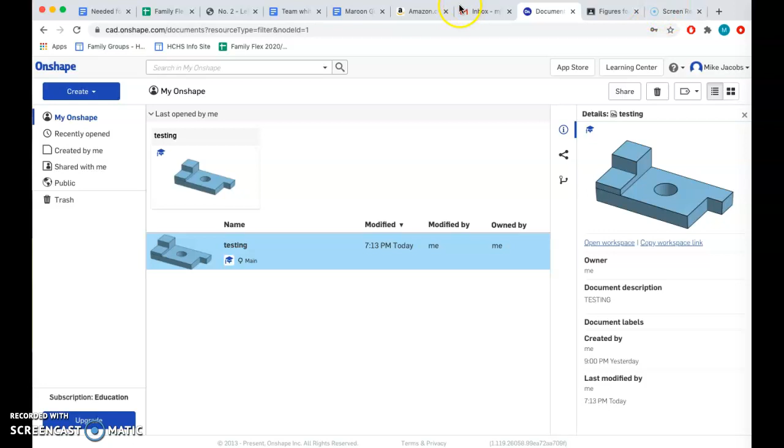Looks like it's onshape.com/education-plan. So I appreciate you doing that. I would like to just spend a little time. We're going to do that figure right there.

The figure is this guy right here. Okay, now it's on Google Classroom where you can see it. I took a picture of it and threw it on my phone just to reference while making stuff. So, yeah, I hope this goes well. Feel free, of course, to email anytime you need any help at all. I'd be very happy to email you.

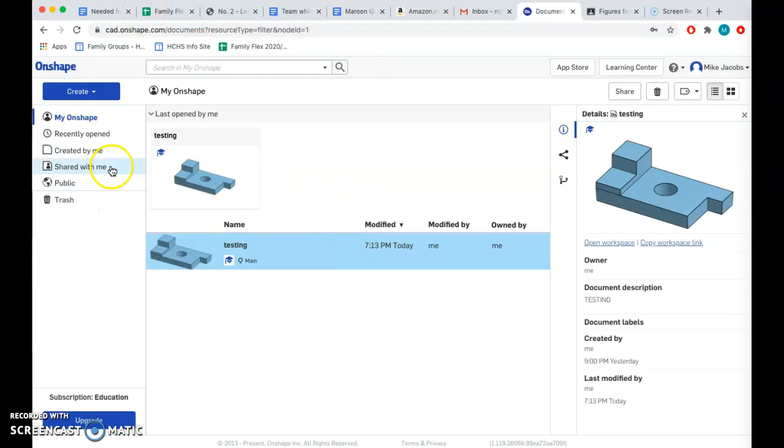Okay, all right, big thing. Create, that's what we're going to be doing. Create a document, and I'll just call this Nathan and Owen. Boom. And we're going to go ahead and get the basics.

Now, please forgive me if I'm a little bit rusty with this. I've only been playing around with this for an hour now or so. So it's useful, it's doable, definitely. I think it has all the same tools as SolidWorks. The only difference is that I'm a little rusty at finding the different buttons and stuff like that. So, but I think you guys will be very forgiving. When we're in the classroom, obviously, we are going to use SolidWorks.

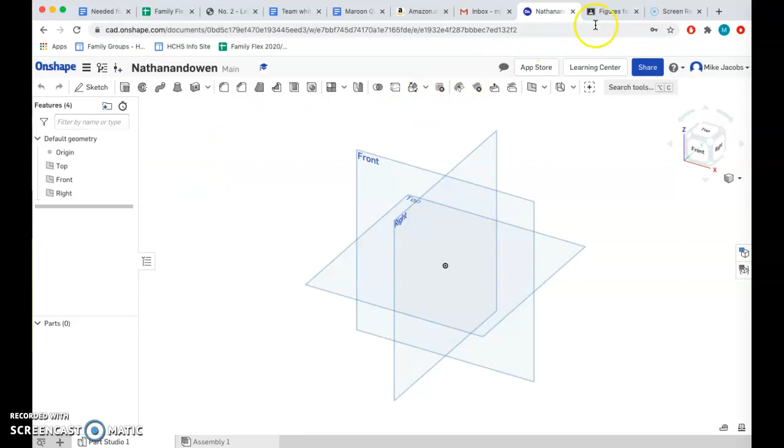Okay, all right, so like I said, we're going to go ahead and make this figure right here. First thing you're going to do is go to Sketch. Now, there's two things: there's Sketches and there's Features. Sketches are 2D, Features are 3D. So you always sketch something in 2D and then you're going to make it 3 dimensional to do a feature.

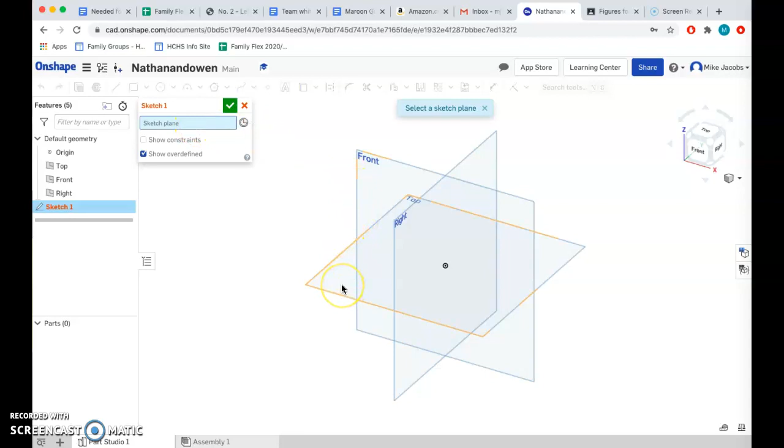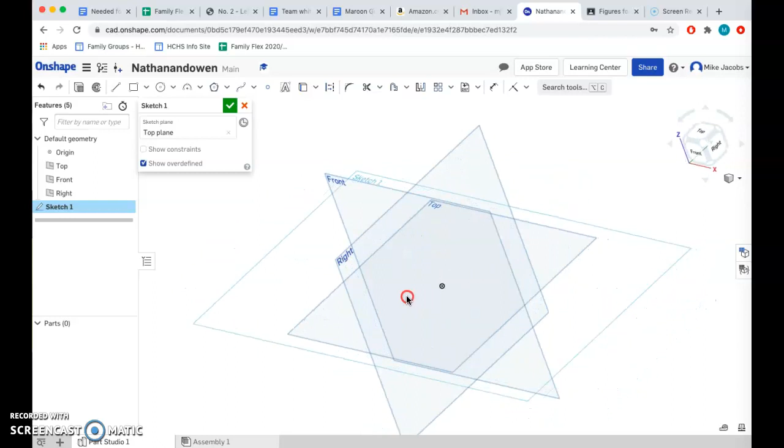All right, so sketch one, it wants to know what plane do we put it on. Our planes are, we can do top, front, or right. In this case, I'm going to go on the top plane, okay? Now, moving around, if you want to zoom in, it's your scroll wheel, so zoom in, zoom out. Tilt stuff, use your right click, your right mouse button, and you can click stuff around to move it, okay?

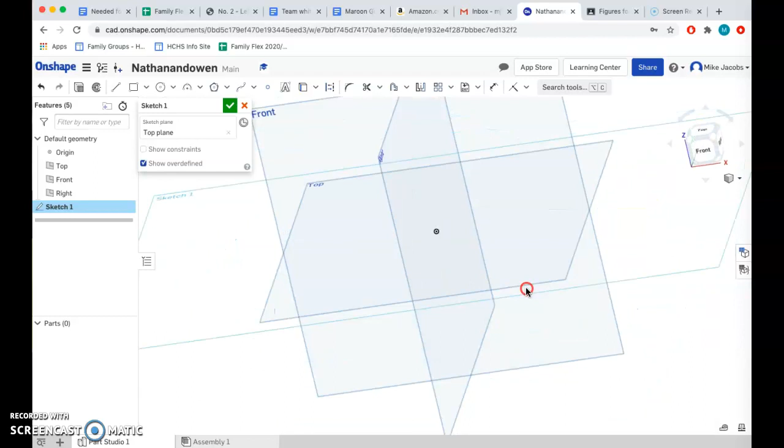You could also click different areas of this box right here if you want to see the top or whatever it is, okay? So I believe I did click the top already. Yep, because sketch one is right over the top right there. First thing we're going to do is do a rectangle. Do make sure it's a corner rectangle. You can do corner, center, corner rectangle.

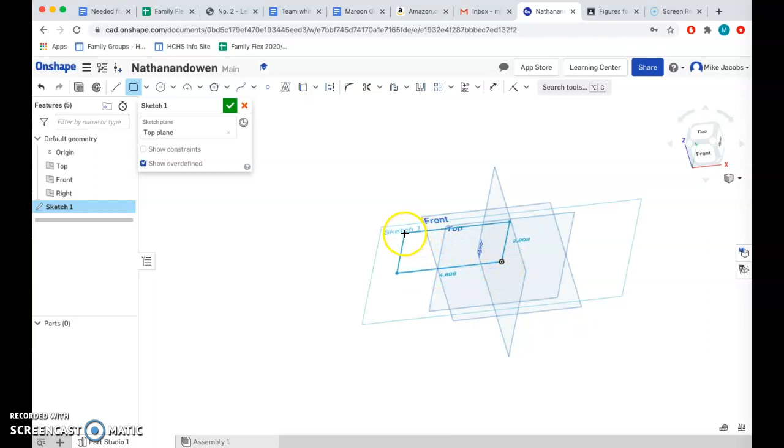Second thing, it is a good idea to get in the habit, that's the origin right here, of always, whenever you sketch something, get in the habit of starting at the origin. That's really, really important. Now, I just noticed here, hopefully I don't have to redo it, but my units happen to be in inches. I do want to change that.

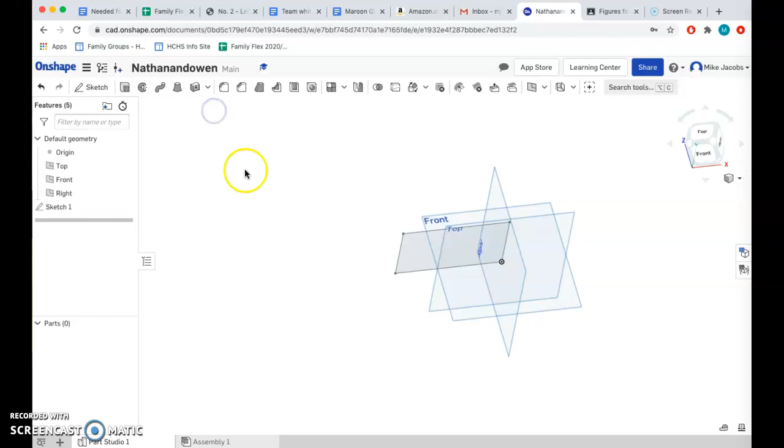So I'm going to go here, my document menu, and go to workspace units. And I'm going to change this one. Oh, that was not good. Change this one to millimeters. Okay, so let's see what that does. Okay, I think we're in millimeters now. We go down here, sketch 1.

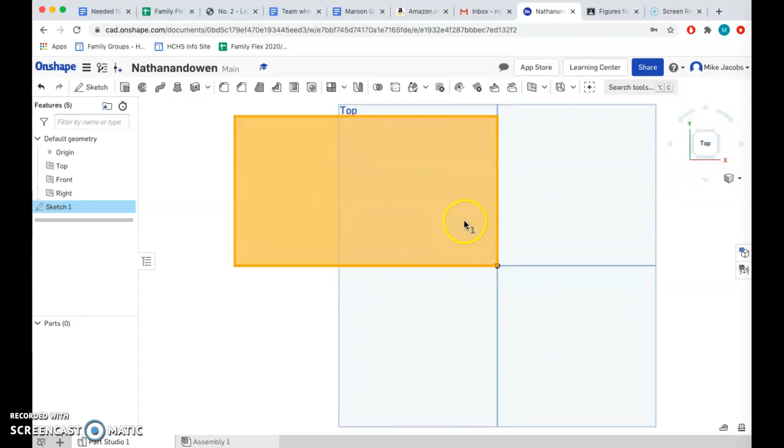Okay, just making sure I'm on the right sketch. Yep, I'm looking straight down at it, so that's good. Sketch 1, I'm going to hit edit. I thought I was editing it, but obviously I got out of it when I went into my document menu.

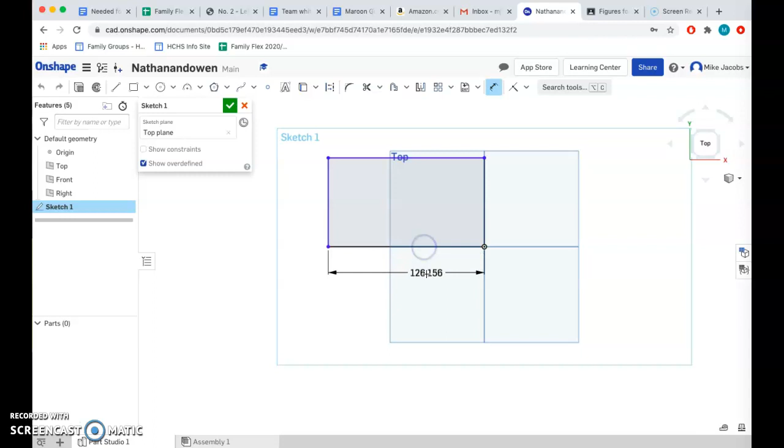This right here is dimension. You'll see in SolidWorks that's called Smart Dimension. Now, if I look at my figure, I'll take this line right here and make it 114 millimeters. And this side here, it looks like it is 57 millimeters right there. Okay, so we got the basic layout.

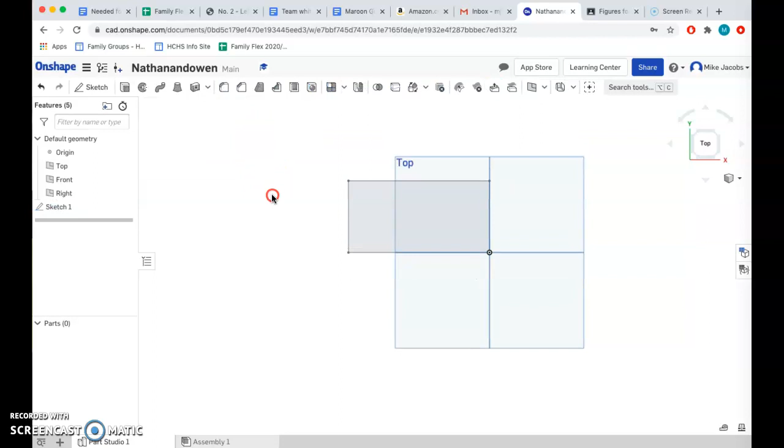I'm going to go ahead, hit the green check to make it so. Move it a little bit to the side. Now we're going to go here. We're going to go to extrude.

In SolidWorks, when you use it, it's going to say extrude boss base. This one just says extrude. So what we're going to do is pull it up. Blind means you're going to pull it up just a certain distance, and the distance we are going to pull it up is 19 millimeters.

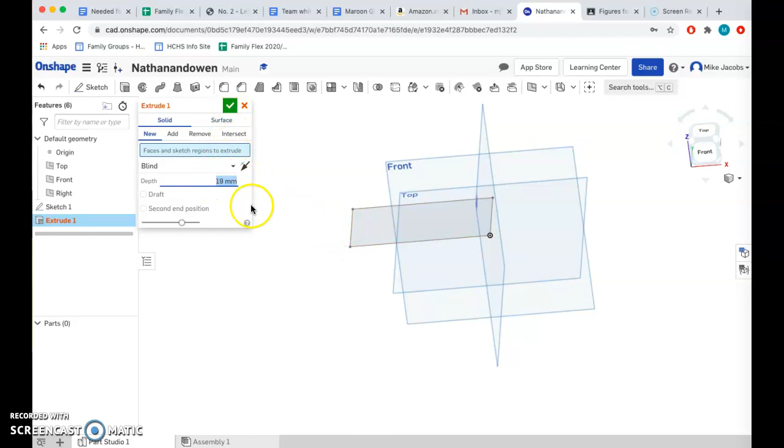So I'll go ahead and hit that. Oh, it's not sure what to pull up, so I think I better click in there. Now it's like, okay, that's what you want me to pull up. Sounds good, we'll do it 19 millimeters. I'm going to hit the check, and we are good to go. So all we did is we made a box and put it up 19 millimeters.

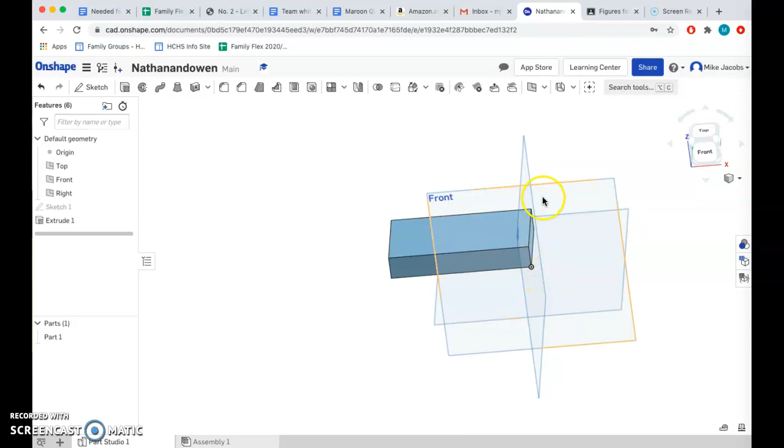I'm finding these planes here to be annoying, so I'm going to right click on it, and I could hit hide all planes. I'll just try hide all planes. Yep, and so we hid all the planes now. We can get them back later on if we need them, but we're not going to need them.

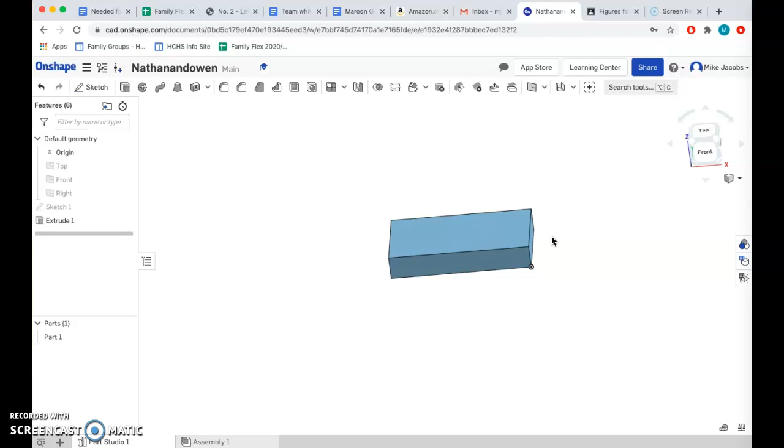Next thing I'd like to do is lop off this corner right here. Looks like it's 38 this way by 16. So I'm going to do another sketch.

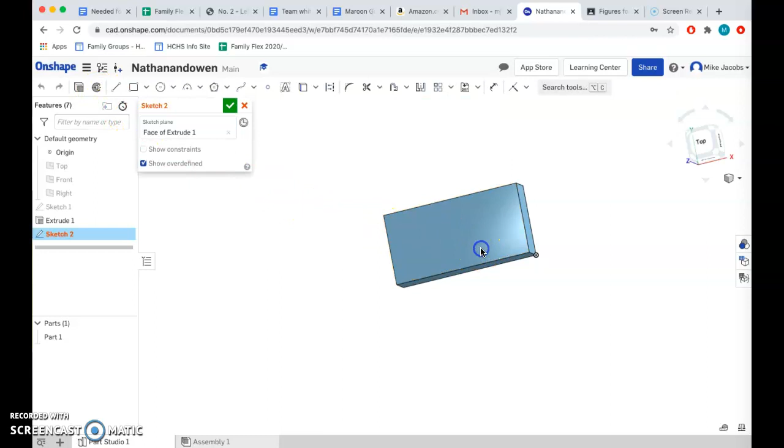Once again, always sketches are 2D, features are 3D. I'm going to click right on this, and it says, okay, you're sketching right on the face of Extrude 1, which is perfect. Okay, I'm going to grab another rectangle.

I'm going to zoom in a little bit, go from this corner, get it close enough. Do a little smart dimension, take this line right here, and we're going to make that one 38. Looks like I was about 10 millimeters off.

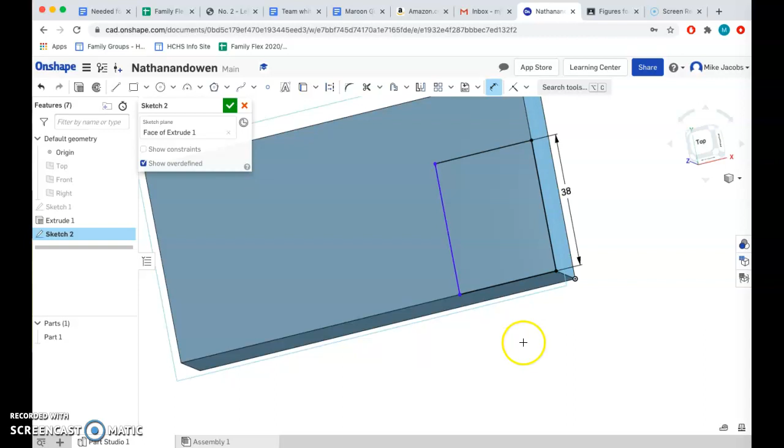Now, I'd like to try something. I could click on this line right here, drag it off, and make that one 16, or let's see if this works - click on this line to that line. Yep, and so it's saying from here to there, we want that to be 16 millimeters as well. Okay, so we have a nice little corner.

If we take a look at our figure, this corner right here, that is what we are lopping off. Now once again, I'm going to go to extrude.

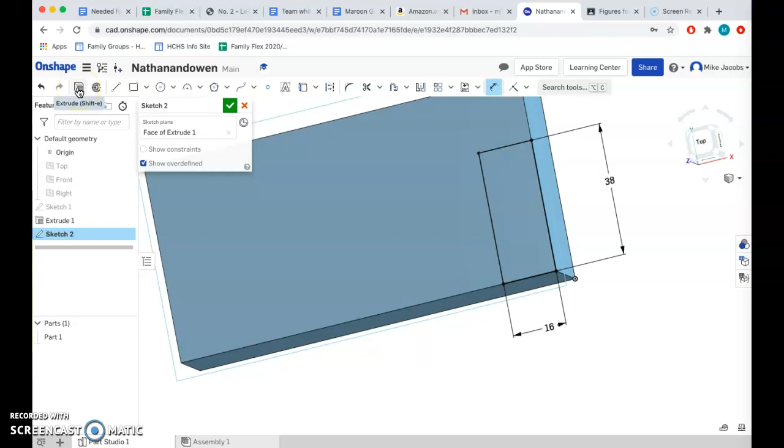Now this is a little bit different on SolidWorks. Here you have to go to extrude and then remove - extrude and then cut it out. On SolidWorks, it's a separate button. You've got an extrude button to add material, and then an extrude cut to get rid of material. I hope it's not too much of a transition for you once you get back into using SolidWorks.

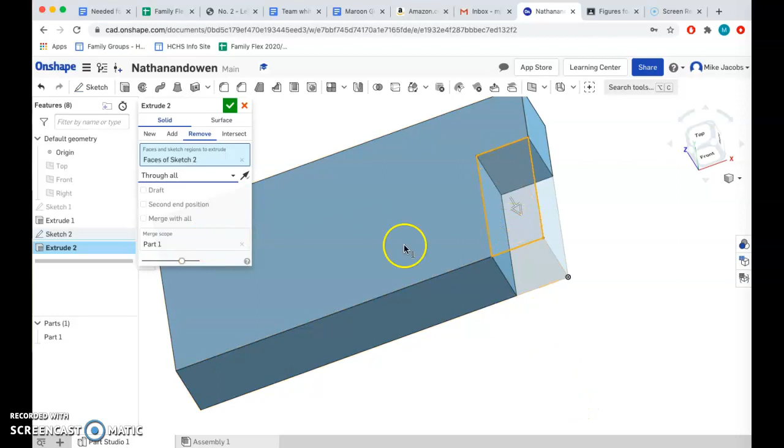Okay, now it's saying blind, and you want to cut off 25 millimeters. You know what, I really don't care how much I cut off, so I'm just going to hit through all. That'll just cut it off forever and ever. Amen. So that's a good start to it.

We lopped off that corner right there. Take a look at the figure.

Next, I'm going to build this up right here, all in one block. Then once again, I'm going to lop this little guy off. It's the width of the thing, 19 millimeters right here.

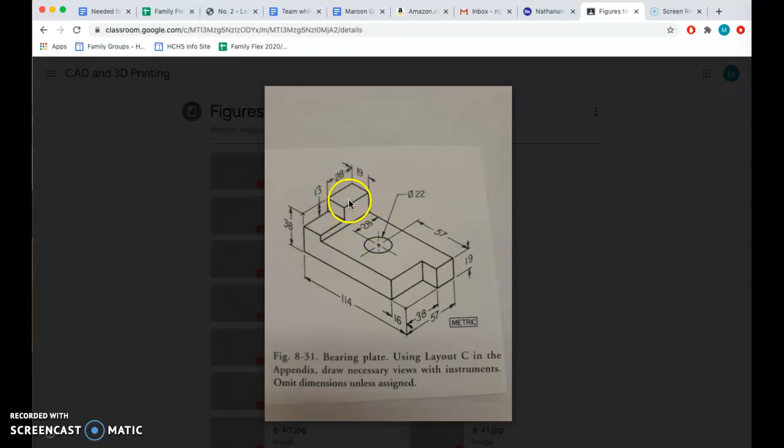So let's go ahead here, once again we're going to do another sketch right there. Corner rectangle, hit it from the corner down, make sure that line turns orange. One thing you want to make sure, if I keep going along here, I'm going to hit a midpoint at some point, and that's good, but you want to make sure you don't hit that midpoint. Once you hit that midpoint, if that thing is highlighted orange, you're going to anchor it in there, and later on you're not going to be able to move this at all. So go ahead and make it.

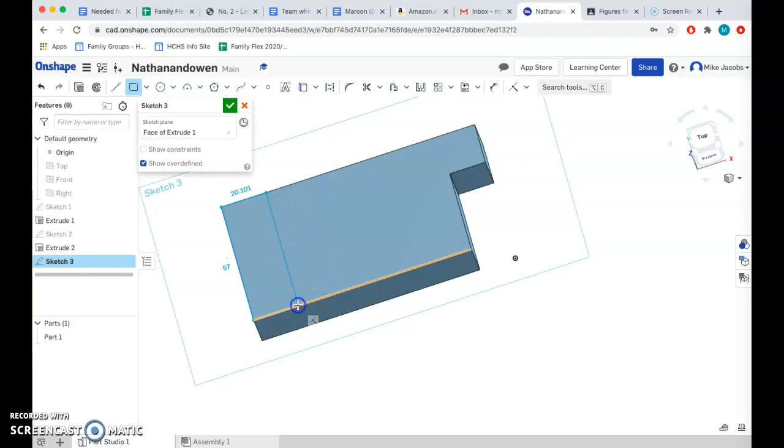Smart dimension it, from here to there, we want that to be 19 millimeters. Bam, right there, and we are going to pull it up. This whole thing is 13. This base was 19, sorry, 38. 38 minus 19 is 19, at least when I was growing up it was.

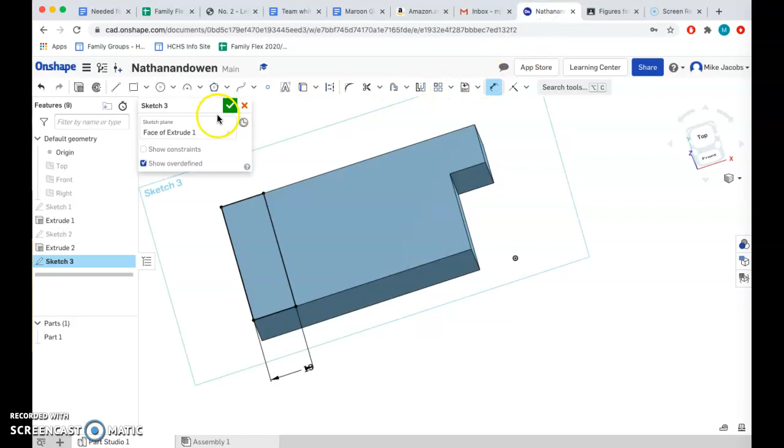So let's go to extrude. Yep, it took a guess, yep, that's what we want to pull it up. And I believe we want to pull it up 19 millimeters. That just did it pretty good right there.

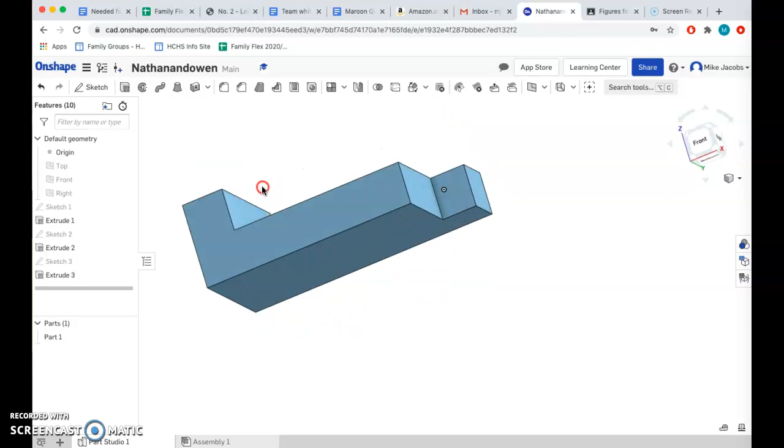All right, I like that angle a little bit better. Zoom out, zoom in a little bit. There we go. Okay, let's go ahead and lop this corner off. So I'm going to do a sketch.

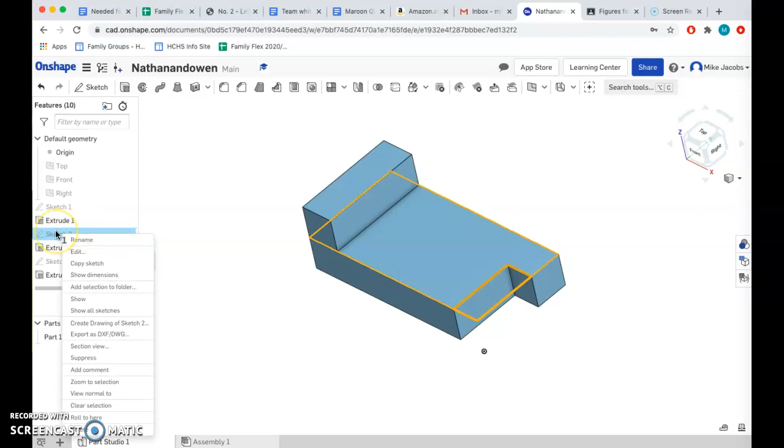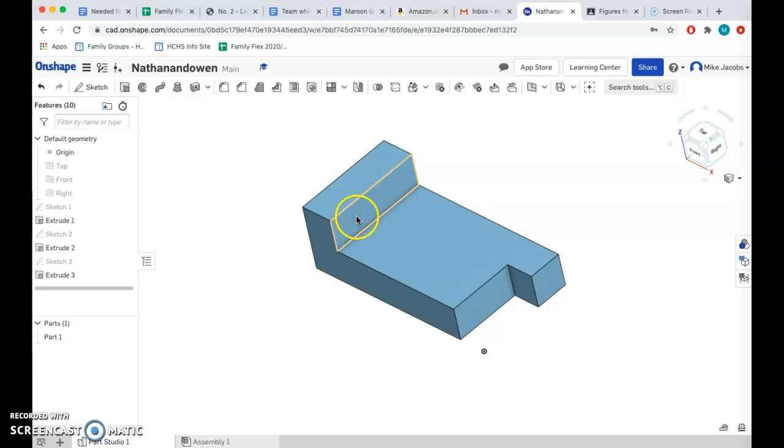Now I should also say, if at any point you want to change something, like you made something and you decide you didn't like it, you can right click on it and go to edit. Like if I didn't like something I made in sketch 2, I can just right click, go to edit, and I could change any of those dimensions. That's really important when you're designing your own stuff. If you do something and you want to change it, or even if you 3D print it off and it doesn't work, you can always change any of that stuff, right?

You're going to do a sketch. I'm going to do it on this face right here. Grab a rectangle, knock about that off right there. Grab this line. Let's make, oh, I don't want to do that, so I'm just going to hit escape. Now I do have to get rid of that, so I'm going to click that dimension and hit delete.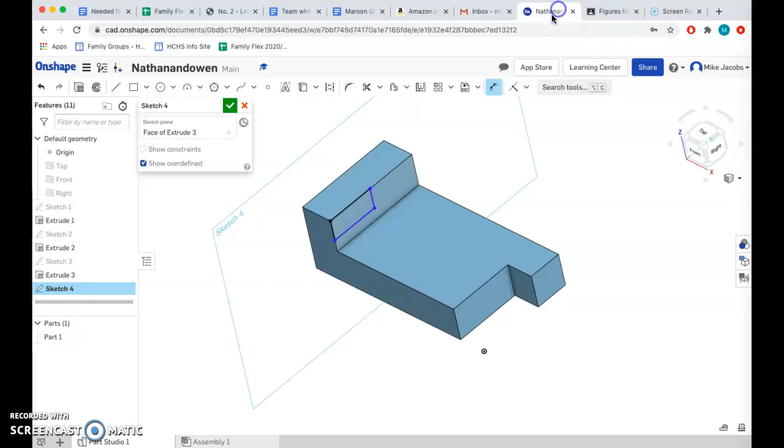If you take a look at the figure, it's 28. I did this one right here, and I could do math to figure it out. I'm just going to lop off 28 here. So what I am going to do instead, oh right there, yep, I'm still on smart dimension. I'm just going to go from here to there and make that one 28 right there.

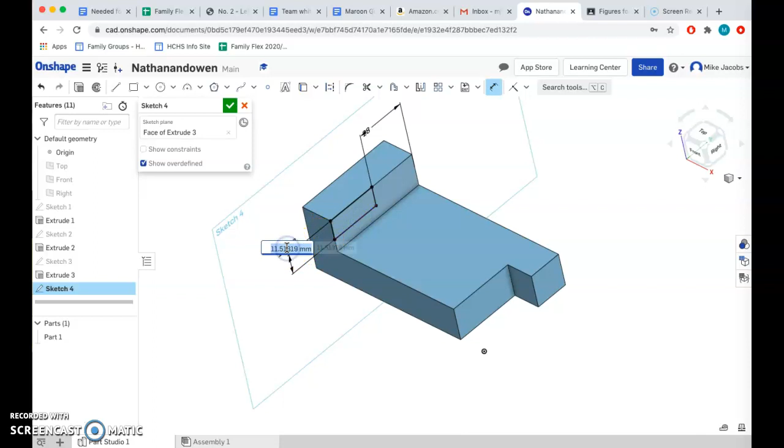Okay, so we got that. The height of this thing is 13 millimeters. So that's what we want to lop off. We like it, hit the green check.

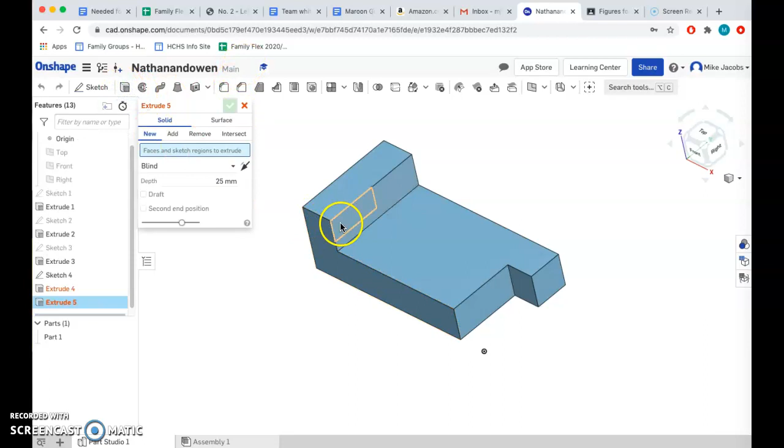Extrude, we don't want to add, we want to remove. And once again, I'm just going to go ahead and say through everything, bam. Oh, it did not know what to do, so it didn't do anything. So I'll still do through all, and then I better hit the thing that I want taken out. So go ahead, hit that.

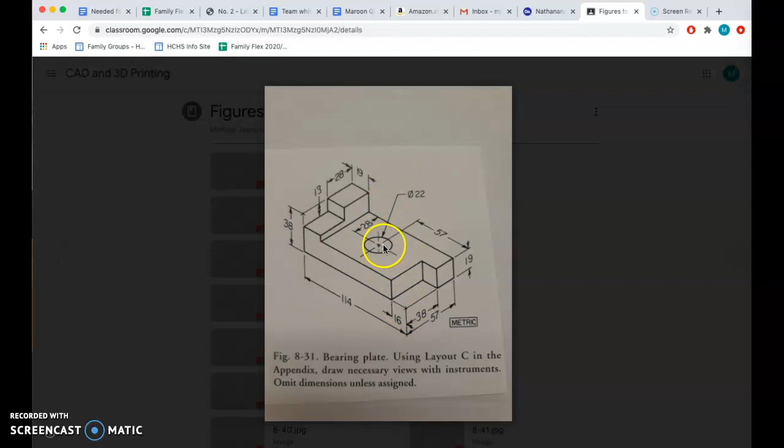So it's looking pretty good, we are definitely getting there. We only have one thing. Oops, you don't want that. We only have one thing left. I want this circle right here. Looks like it's 28 millimeters in from the side, 57 millimeters in from the end.

So let's go ahead here, do a sketch, a little 2D guy. Once again, right there, center circle, we're going to go ahead. Now keep in mind, if I do it here it's going to be wrong, I'm going to do it just to see what happens. But if I make the center of my circle right there, I just anchored it in with this midpoint, which is going to give me troubles later on, okay?

That symbol right there, that means diameter. Oh, how nice, look at that. It's probably because the rest of my family's on computers too, and this is kind of driven online. So I'm going to go ahead and hit this. Boom, a little bit big. We only want it to be 22 millimeters.

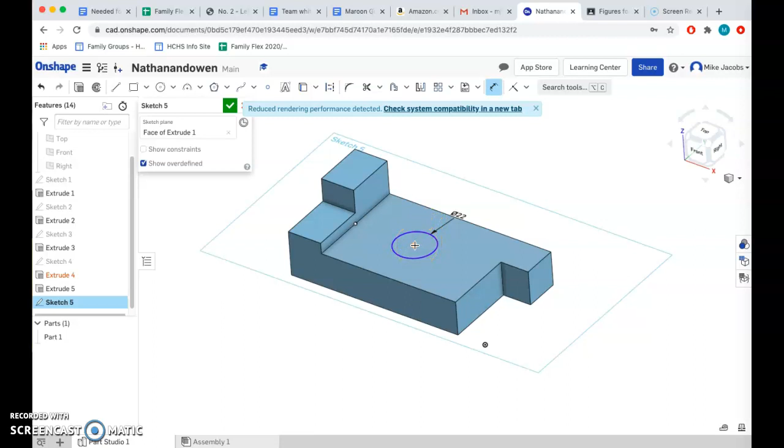And now this is a little bit different with SolidWorks as well. Here, you have to make sure if you're dimensioning to the middle of a circle, you go middle of a circle to a line that you want. You can also dimension from the outside of a circle to a line.